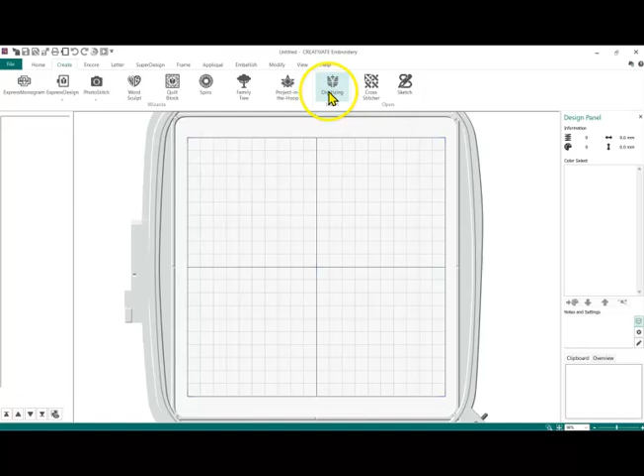And we're going to go to the Create tab, and into the digitizing module. Do not click on that finish. I'm just going to say cancel here.

So what we're going to do is go into Point Create. We are going to turn off pattern fill for now by left clicking in the upper portion of the box. See how it goes from green, it's activated. If it's white, it's not activated.

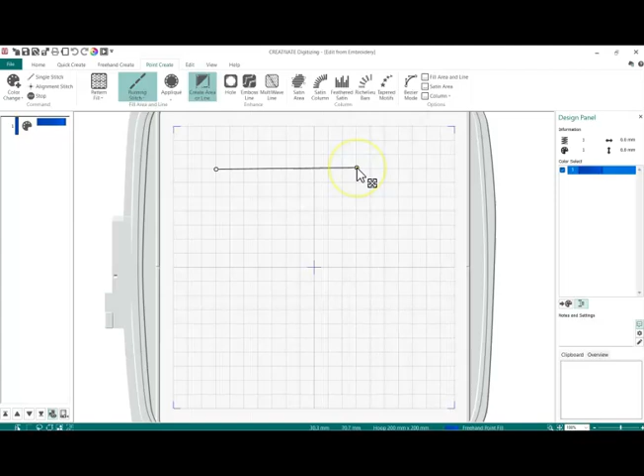And we're going to do a running stitch here. Remember, anytime you see those little arrows, there's something underneath them. We're going to go to Create Area or Line. I'm going to show you what happens if we use the wrong node. So I'm going to click here, and here, and here, and here.

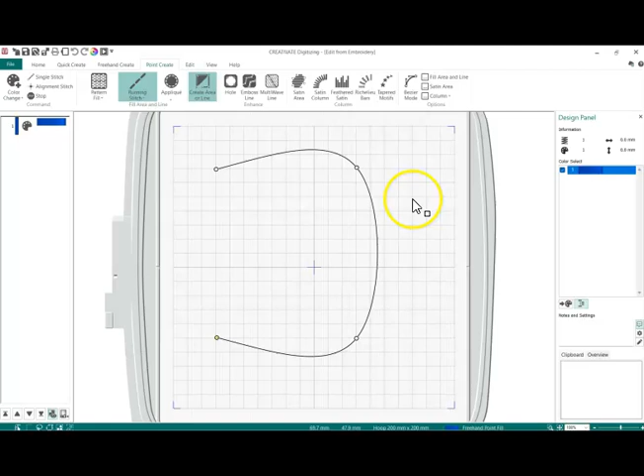See how a circle node, the white circle node, has a curve to it. If I hold down the Shift key, let me get rid of this. If I hold down the Shift key when I'm making my square, notice how we now have a square. So that's the difference between the circle nodes and the square nodes. To get a square node, you have to hold down the Shift key.

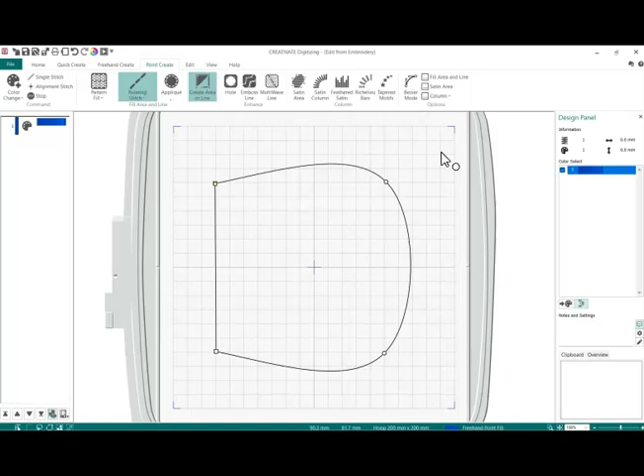And if I want to change them, say I've got circle nodes and I want to change them, all I do is click on that node and hold the Shift key down.

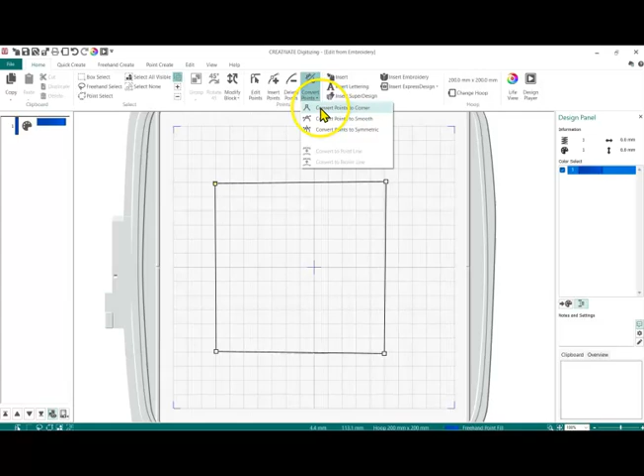If I want to add nodes to something, we can go to Insert. So I'm in the Home tab, and I can go to Insert Points, or Delete Points, or even Convert Points. So if I clicked on Convert to a corner, it's going to do the same thing as changing it from a circle to a square and vice versa.

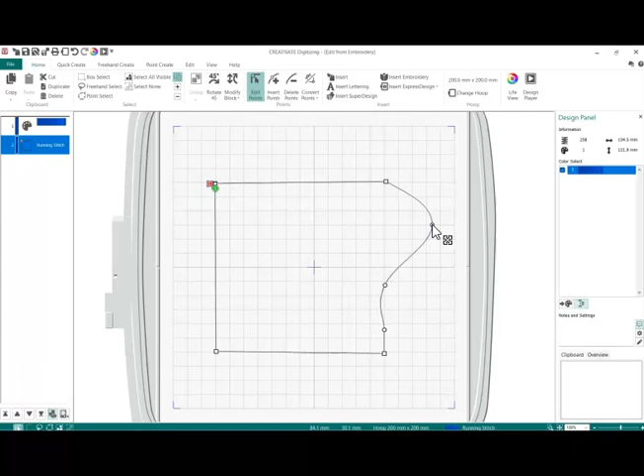So if I do Insert, and click, and I can go back to Edit, and I can take and pull that out. Or I can hold the Shift key down and pull this in. And that's basically all it is to the nodes.

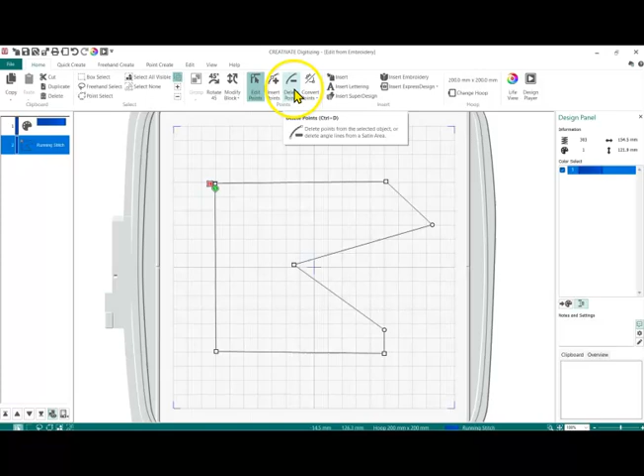You can delete points if you want. You just have to remember that once you've deleted them and you want to change something up again, you have to go to Edit.

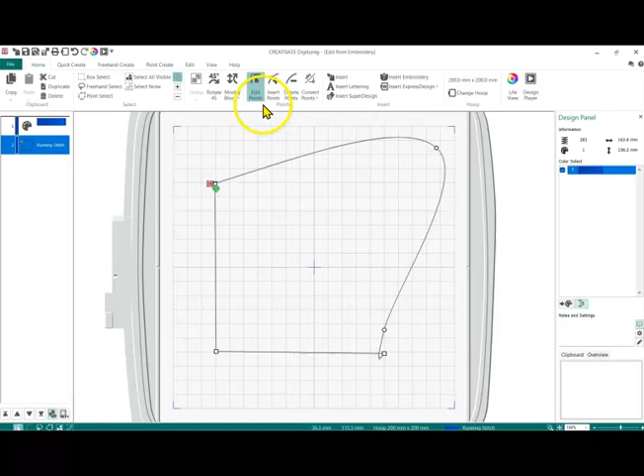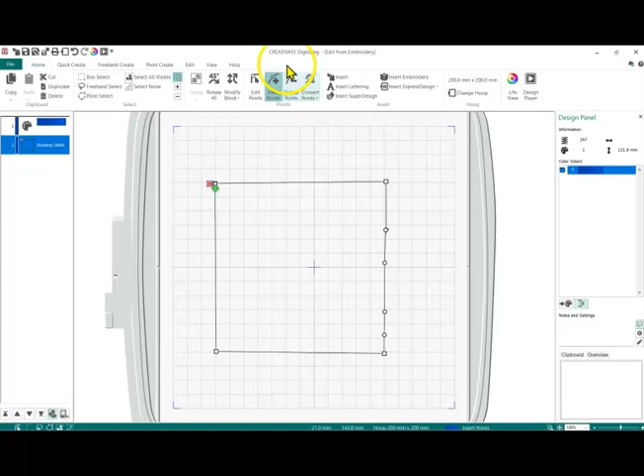If I had left the delete points on and I wanted to add more points, it's going to delete them. If I go to edit, insert points, and before editing I just hit the point, it's just going to make another on top of the one that was there before. And I keep clicking and it's going to keep adding them. So you have to remember to go back to that edit.

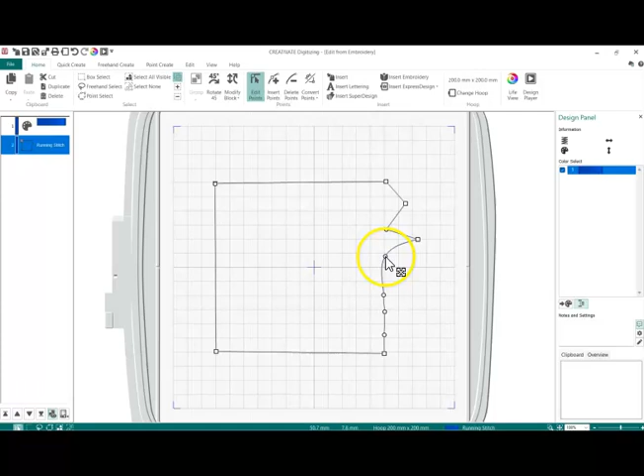If I hold the shift key down, and if I move this way, I put this out here and hold the shift key down. So you got to just get in there and play with the nodes.

I'm going to add a fill. Let's do radial fill. Let's do satin line. Say OK. I can move these up here, I can move these down here. This is really neat to use this fill for angel wings. And I can change the density. And that's all there is to it.

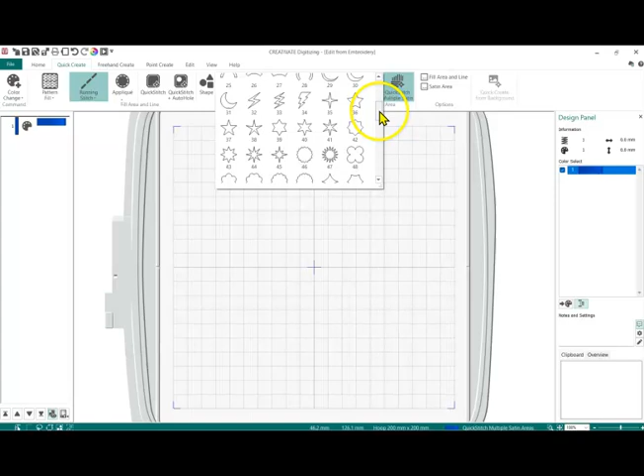And we're going to delete everything there. And now I'm going to go to Quick Create into the Shape Maker. And I'm going to go find something that has a lot of points to it. How about this one?

So if I hold the Control button down, it will resize proportionately. And if I were to right click over this tile, I can go into Properties.

I can change the stitches. I can do a motif line if I want. Let's do this, see what it looks like. Oh, that's kind of interesting.

Okay, you can change the category. Say we're going to do an applique. And I like to use number 4 for applique.

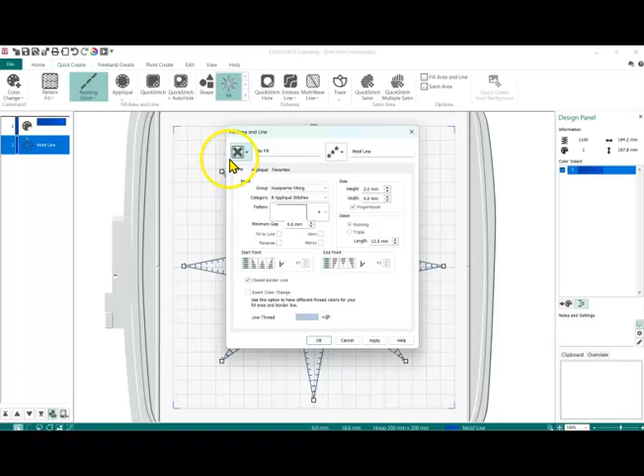And we say apply. And right now, the applique is on the outside, and I want to do it on the inside. If I right click in there twice, or right click here and go to Properties, I can change and make this into an applique, standard applique, select fabric. The quick applique is just the colors.

And that's what, if I said OK here and apply, let's change the color so we can see things a little better.

You can make the height of those blanket stitches taller. You can make them closer. You can make them farther apart. Like I said, you can hit the mirror and it goes on the outside, mirror to the inside, and we just made an applique.

We can also add a fill on top of that applique. So let's move this out of the way and see what that does. Oh, that's kind of cool.